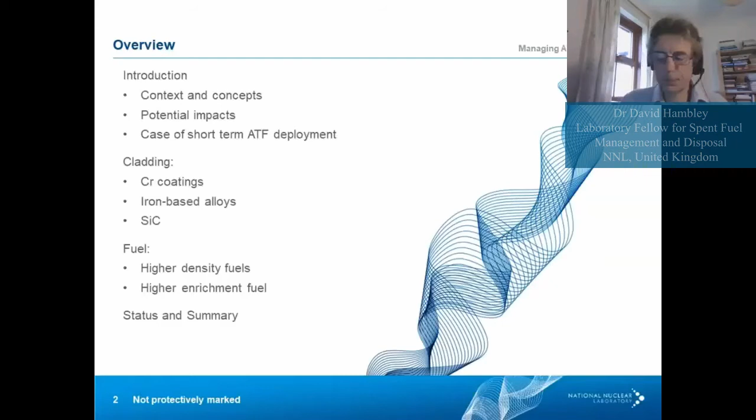Briefly, I'm going to introduce what accident-tolerant fuels are, where they came from, and what the potential impacts are. Then I'll give a summary of the main aspects associated with the most common types of cladding and fuel currently being considered, and a brief summary of where that leaves the position. Subsequent presentations will go into more detail on particular aspects of this.

Accident-tolerant fuels arose as a response to the Fukushima accident in 2011. In particular, the idea was to seek to improve the accident tolerance, the length of time fuel could survive under severe accident conditions, to allow improved capacity for management of severe accidents.

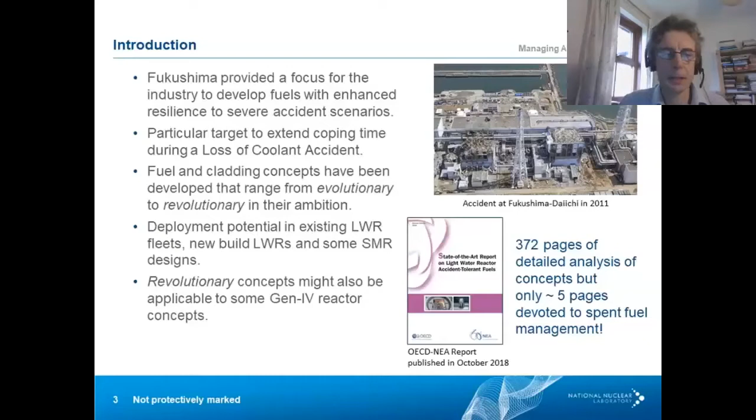It must be said that a lot of work has been done on analyzing the accident at Fukushima Daiichi, however very little has so far focused on the spent fuel management aspects, and it's now very timely that these are under consideration. In terms of the concepts of what an accident-tolerant fuel might look like, there are two strands.

One relates to cladding, and one relates to fuel. The cladding is primarily there to protect the fuel, and the improvements seek a cladding that will last longer in extreme conditions.

So we have coated zirconium alloys. People are also looking at iron alloys, and silicon carbide composites are the three main types of modifications being considered for the cladding. Of those, the chromium-coated zirconium alloys are closest to deployment or in the process of evaluation.

The fuel aspect really involves developments proposed to improve the economics and make accident-tolerant fuels more attractive for reactor operators.

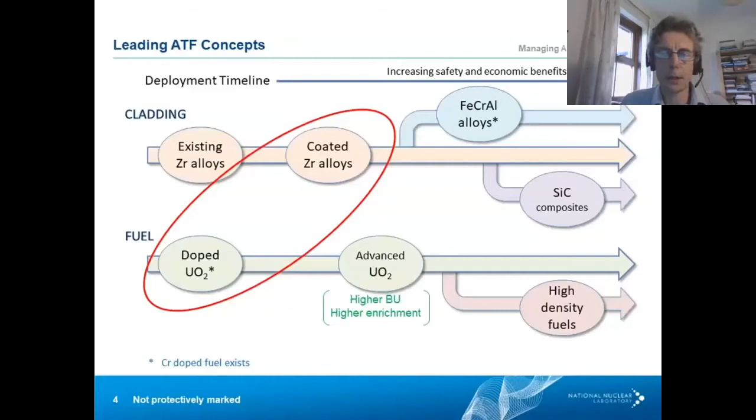There we're looking at doped UO2 and advanced UO2, which allows us to go to higher burnups and higher enrichments, thereby also reducing the amount of fuel we need. And finally, continued investigation into higher density fuels, which allows better irradiation performance.

Briefly, in terms of the impact of ATF, what do we mean? For us, spent fuel management means what happens to the fuel and how we manage it from its discharge from the reactor through storage, transport, and until it's disposed of in a repository. We also consider management of the fuel up to reprocessing, if that's a chosen route.

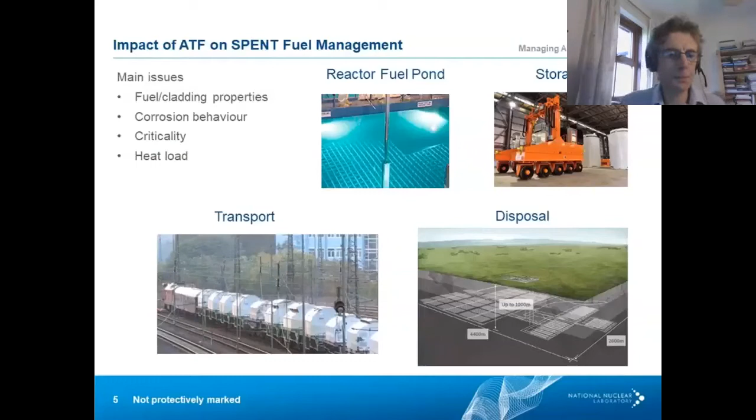This is just to highlight that it's not just about accident tolerance. We must have a product that is usable and deployable into nuclear reactors in a cost-effective way.

A lot of work has been done more recently looking at the economics of how we deploy the near-term options. I've put a brief slide here, and Al Santos will go into this in much more detail in his later presentation.

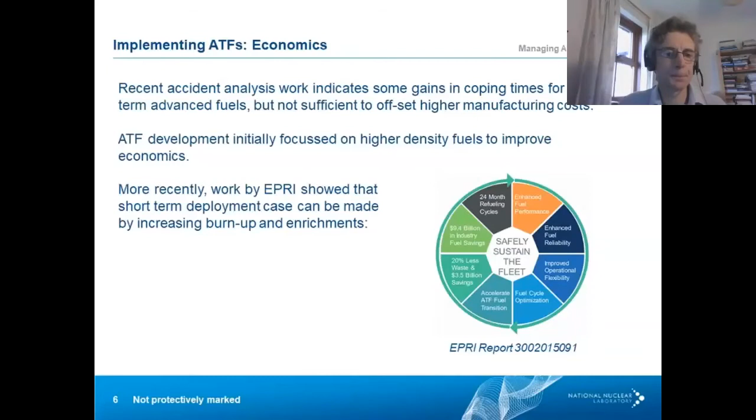Moving on to have a closer look at the claddings now. The first cladding, and the most advanced options, are associated with coating the zirconium alloy with a non-reactive coating, of which chromium has been the most attractive option and the one furthest towards deployment.

In these, chromium is deposited as a very thin layer on top of the zirconium cladding. It provides a non-reactive surface which produces a chromium oxide surface layer, which continues to protect the cladding up to much higher temperatures and delays the onset of any zirconium-steam reaction.

The pictures you see here are of the chromium-coated cladding in the bottom left-hand corner. In the top right-hand corner is a cross section, and the very bright layer at the top shows the thickness of the chromium coating, which is very thin but very well adhered. The bottom right shows a more detailed example of the coating.

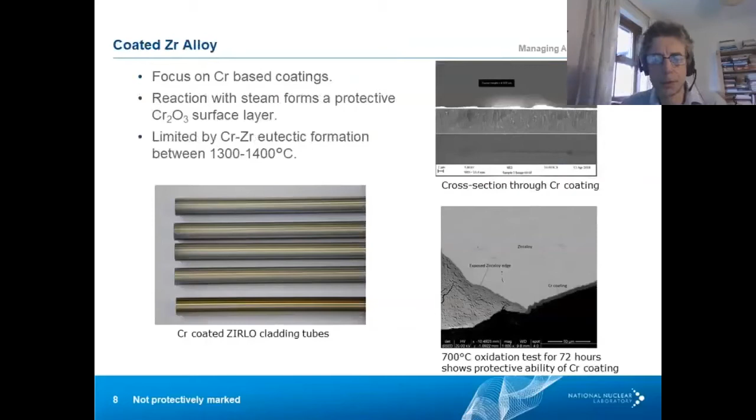You can see immediately the effectiveness of the coating through this defect in the cladding coating, which was deliberately left there to explore and demonstrate the effects of oxidation.

So in terms of thinking about their impact on the back end, chromium coating significantly reduces weight gain during steam testing. Hydrogen production is also reduced in normal operations, and therefore the risk of hydride formation or reorientation during subsequent storage is also much reduced.

In general, we expect that the performance will not be adversely affected, whether that's in storage, transport, reprocessing, or disposal. The failure site characteristics and matrix corrosion are not expected to be adversely affected.

There's a question about whether putting a large amount of chromium into a repository system might give rise to some chromate levels in the repository, which might alter water chemistry. That's something that would need to be looked at in the future. But overall, these are not expected to have a significant impact on the back end.

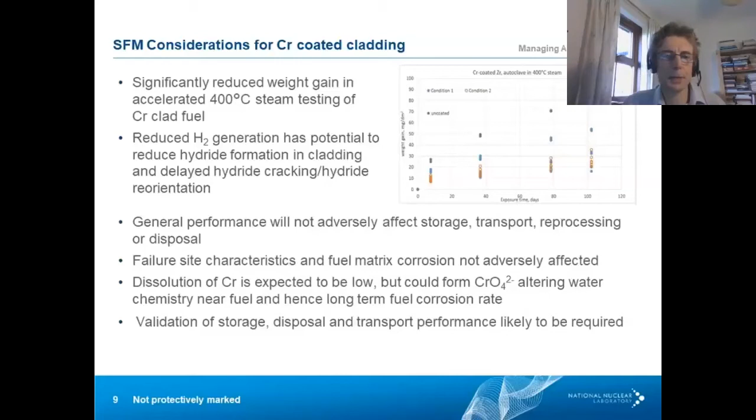Moving on to iron alloys. The iron alloys have been used in the past and are still used in some reactor systems. In general, they have a neutron penalty, and zirconium in water reactor systems offers better corrosion performance.

However, the alloys under consideration include aluminium for higher temperature oxidation and an iron-chrome mix that provides a protective layer under normal operating conditions.

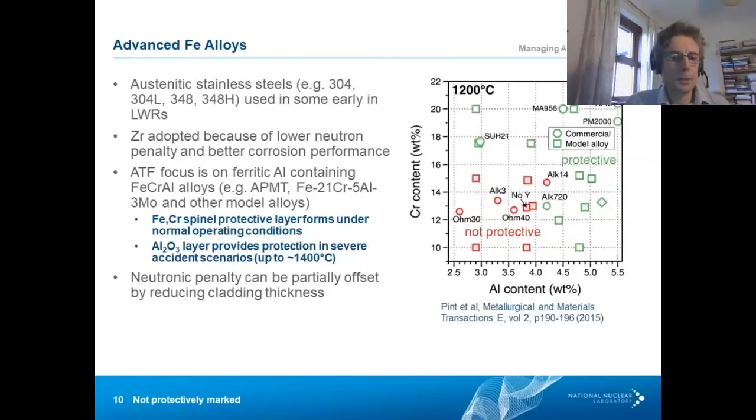In terms of the impact on the back end of this, we know from experience that stainless steels corrode very slowly over very long periods of time. In some cases, or some combinations of temperature and neutron irradiation, depletion of chromium at grain boundaries can occur, and that can lead to sensitization. Although the extent depends on exactly the grade of steel and the irradiation conditions, storage conditions that mitigate the risk associated with corrosion have been established around the world.

And therefore, so long as the sensitization of the stainless steel is compensated for, the presence of steel as a cladding is not expected to generate any significant issues during back-end management.

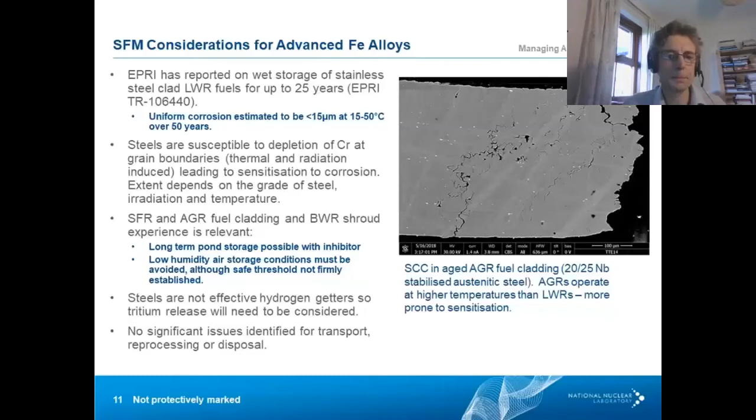Looking briefly now at silicon carbide composites, these are very different from current cladding materials, very attractive due to their high temperature oxidation resistance and low neutron absorption. However, they are novel. There are challenges around the cost of manufacturing, the ability to manufacture the fuels, and their long-term hydrothermal behavior. This is seen as a much longer-term development opportunity, and research is ongoing on that, and it's important that as that research progresses, consideration of the conditions in the back end of the fuel cycle are also taken on board, and that can be done effectively during the development programs.

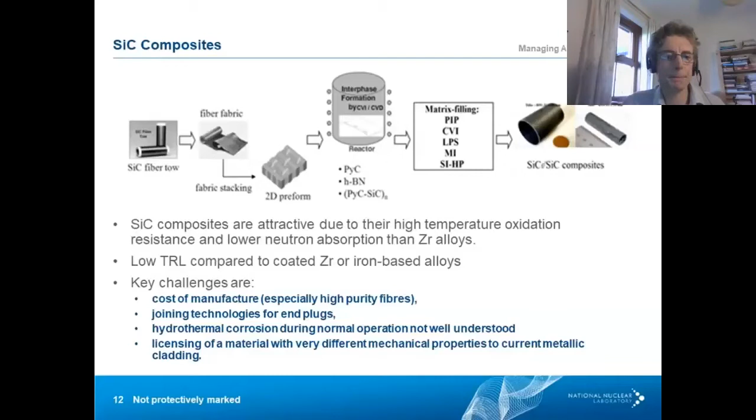There's very little data on the behavior of silicon carbide composites post-irradiation. There is only anecdotal evidence from the management of research and development fuels, but there is need for a systematic evaluation of their behavior after irradiation under relevant conditions.

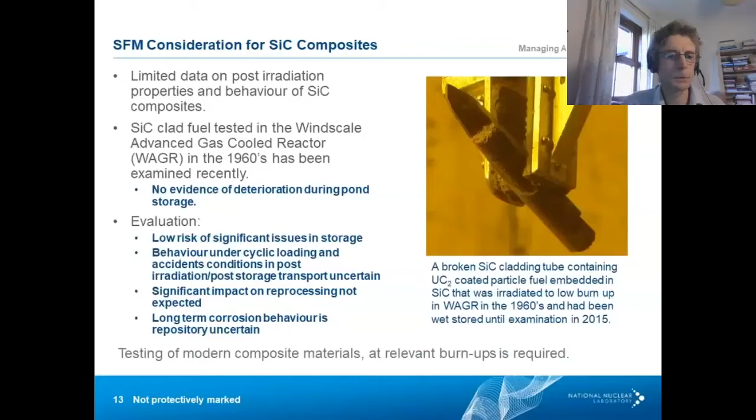Finally, I'm going to talk briefly about potential changes in the fuel itself. In terms of improving the fuel, to reduce the temperature inside the fuel during accident conditions, it's possible to dope the fuels to improve their thermal conductivity and or to change the grain size so that fission gas release is reduced.

Work was already well underway looking at chromium doping for larger grains to reduce fission gas release, and further work on that is expected to continue. I should just say that on the doped fuels, they're not expected to have a significant impact on the back end, although the effect of additives on oxidation behavior would need to be confirmed, but it's more expected to be a confirmation than a source of concern.

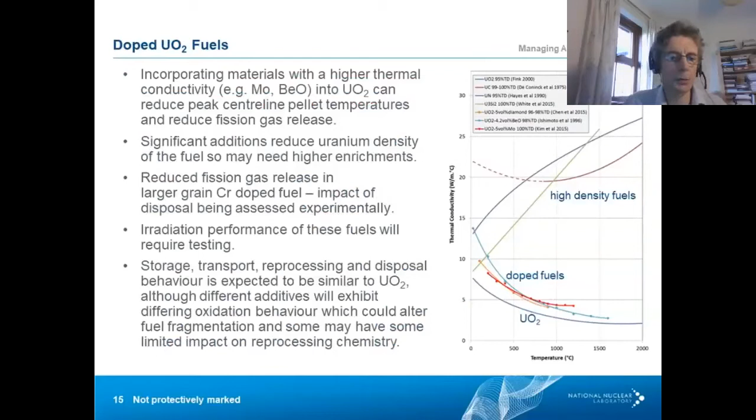Looking at the other higher density fuels, a large number have been examined over the years, and some are still under consideration for fast reactor applications. They are, however, in general, much more reactive than uranium dioxide. The four listed here have all been looked at to some extent during recent years, and both the carbides and the silicides have fallen by the wayside as a result of their poor reactivity with water.

The main contenders still under development at the moment are nitride fuels, where continued work on doping and modifying the fuel to enhance its resistivity to water exposure are still underway. These are much longer term prospects, as there are challenges both in the fuel development, manufacturing, and also in demonstrating compatibility with irradiation conditions.

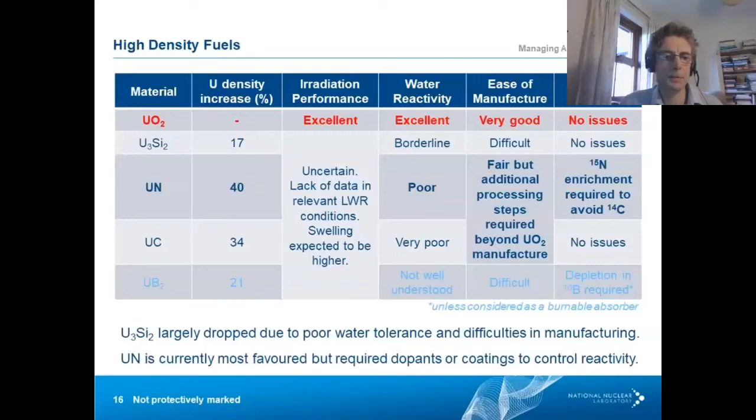If we think about the back end, reactivity with water and air remain issues for storage, transport, and disposal. Although the temperatures are much lower under these conditions, the duration of exposure is also potentially much longer, and therefore behavior of irradiated materials under less extreme conditions needs to be understood. The mechanisms may also be slightly different, although that mainly relates to silicides rather than oxide and nitride forms.

In reactor performance, improvements in terms of stability of exposure to water will automatically help the management of these materials in the back end. Reprocessing of the higher density fuels should be feasible, and likewise recycling, but they are more challenging than current standard oxide fuel reprocessing.

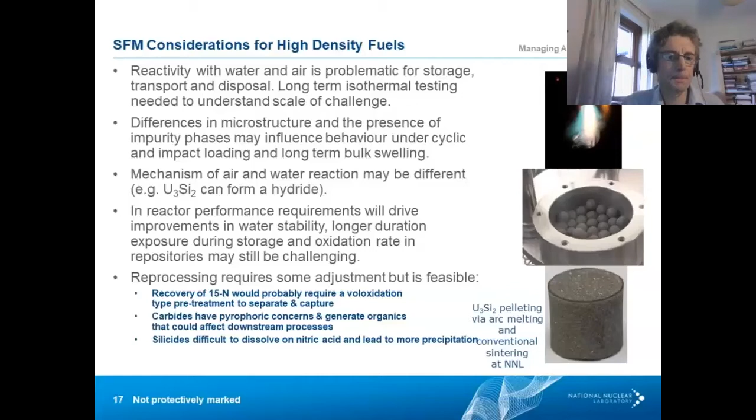The near-term deployment option would be to increase the enrichment of existing UO2 fuels. And there, the challenges are less, but there are still some challenges, particularly around criticality, having sufficient data to back up the validation of safety and inventory codes.

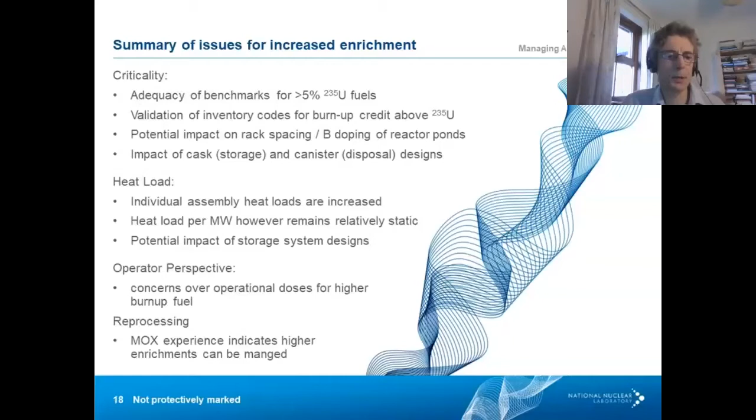The potential higher individual assembly heat loads would need consideration and might result in changes to the design of storage systems, although it's not expected to affect the fundamental basis of storage systems that we currently have. And there's a potential for higher operational doses from higher burn-up fuels. Again, these can be managed by design adaptations to existing systems. And the MOX experience indicates that higher enrichments and their effects can be adequately managed if you're looking at reprocessing.

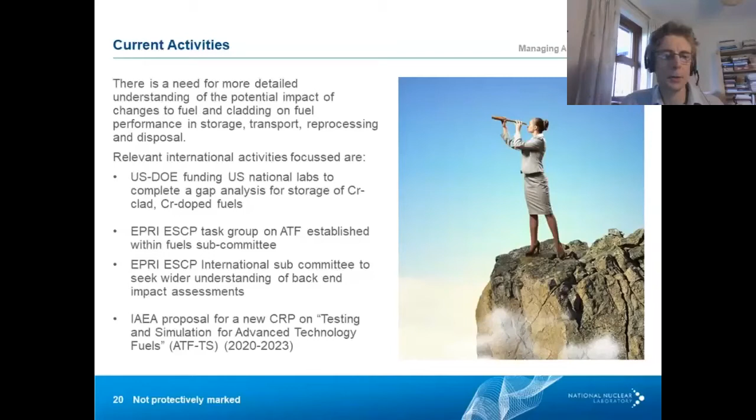There are lots of activities underway looking at the behavior of fuel and cladding in storage, transport, and disposal. Some of them are listed here, and these are valuable contributions to making sure that we can manage the back end, and that the new fuels do not present unexpected problems for their future management.

For higher density fuels, there remain challenges before they're shown to be acceptable. Both them and silicon carbide claddings would require substantial further work before we could be sure that they're manageable in the back end.

But such testing and validation could effectively be incorporated into the development programs in a cost-effective way. Thank you. That concludes my presentation.

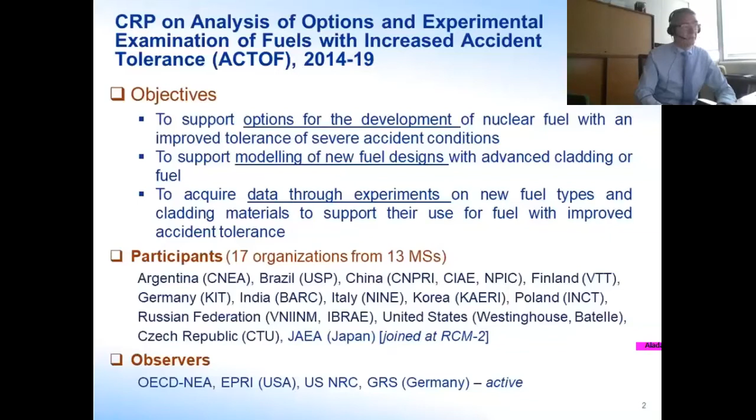And traditionally we have observers, and in this CRP we had our constant, permanent observers from OECD NEA, EPRI, US NRC, and GRS from Germany, who were active participants and participated in our benchmarks.

As I explained, the project was recently finished, and we have already published the tech doc with the main results, which you can find on the IAEA site, open access.

Normally a CRP includes individual tasks, but the most important part of the project is joint actions, where several collaborative activities are carried out. In this case, we had round-robin tests, a benchmark exercise, and a joint exercise of experimental modeling for severe accident conditions.

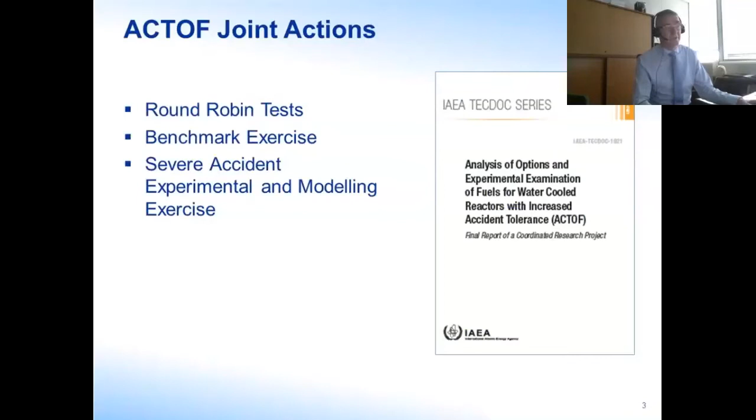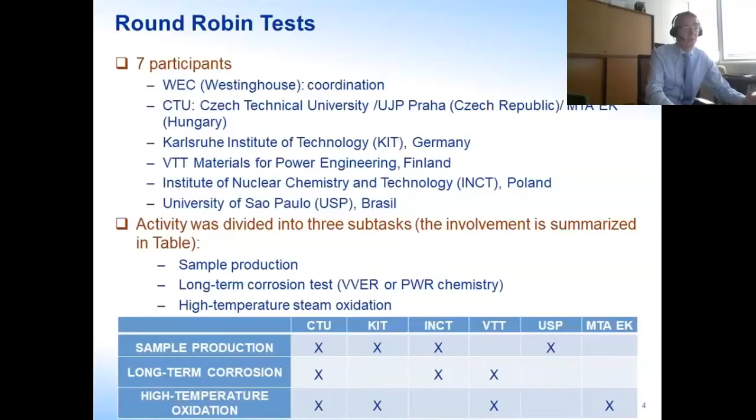There were 3 tasks: sample production, long-term corrosion test, and high-temperature oxidation tests. Each participant took part in one or several of these tasks. For instance, University of São Paulo provided their samples but did not participate in experiments, while Hungarians only ran experiments, but several participants participated in all 3 exercise stages.

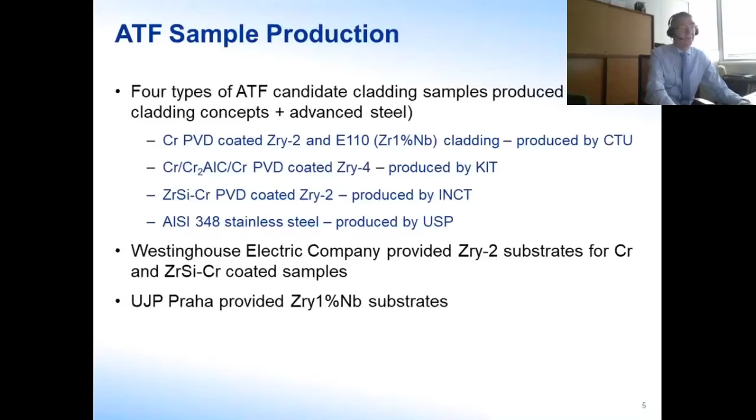Yeah, and a few slides about the main results, more interesting.

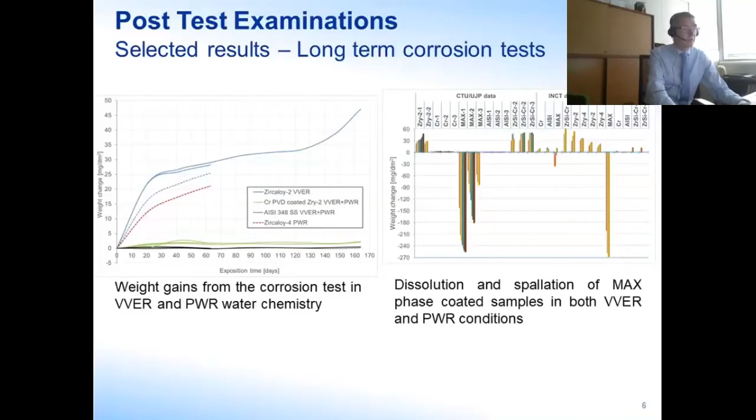Sometimes, as with max phase coatings, a very strong spallation effect was observed, so eventually there was no gain but loss of material. For this reason you cannot see it in the left graph. There was relatively good behavior for the steel samples, but the best, of course, was the chromium coated samples.

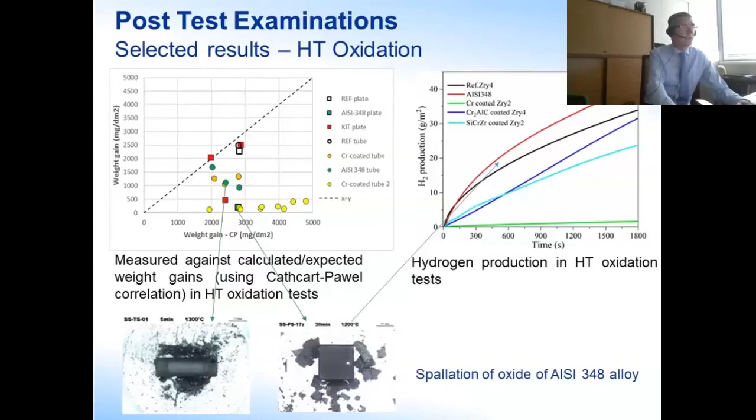For this reason, the main criterion eventually chosen was hydrogen produced. The black line is the reference zirconium alloy cladding, and due to this spallation effect, oxidation of steel was very high, while others performed better than standard Zircaloy. Again, the best behavior is shown by the chromium coated samples, also shown in this picture: two samples, one without coating and one with chromium coating, both at 1200 centigrade for 30 minutes. Here you can see the oxide layer thickness, with chromium much lower.

Special attention was paid to testing residual ductility. We only started this exercise, but it will certainly continue in the next CRP, because due to this effect of very small oxide layers, the traditional ECR criterion of 17% cannot be used, since oxides are very small and this is the main contribution to oxidation for ECR. On the other hand, ductility of these samples also increases, sometimes significantly. Many countries are now working on new criteria, and some preliminary results are shown in this picture, but I will not go into details.

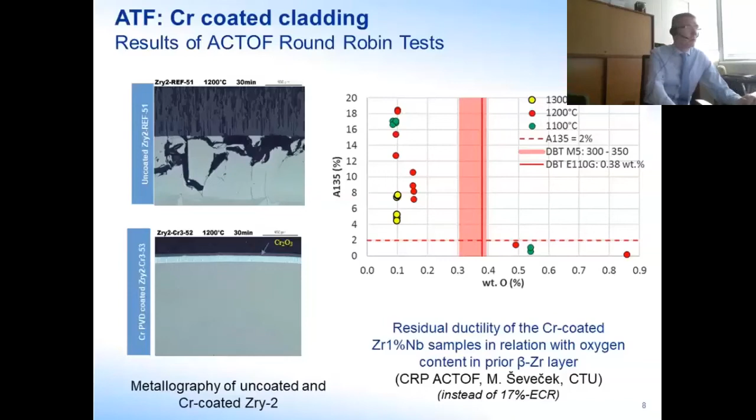Now talking about another exercise, as you remember we organized a benchmark. In this case it was a comparison of the behavior of FeCrAl against standard Zircaloy 4. This exercise was organized by INL, Idaho National Laboratory, who provided the modeling input, normal operation case specification for two cases, UO2 with FeCrAl and with Zircaloy 4, and LOCA case specification. It was two different exercises, including output format, in order to analyze, compare and review all the results.

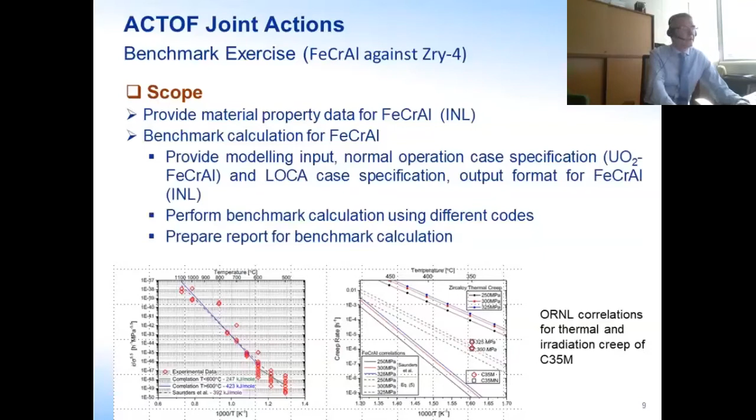Very briefly, we had six participants in this exercise: INL with Bison code, ENEA from Italy with Transuranus code, University of Sao Paulo with modified FRAPCON code, Argentina with their national BACO code, and Japan with JAEA using FEMAXI.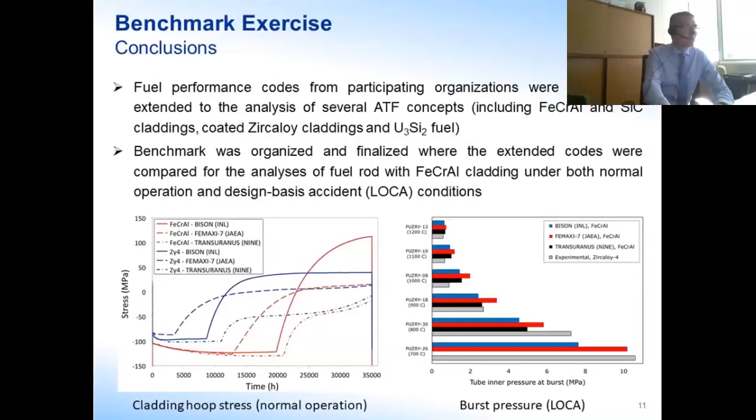The third work package, as I mentioned before, was the severe accident experimental modeling exercise, prepared by KIT, who shortly before our CRP carried out a new test, Quench 19, with FeCrAl cladding. It was an international test; materials were provided by the United States, Argonne Laboratory, and used in the bundle facility of KIT for Quench 19 with FeCrAl claddings. This data was analyzed using two severe accident codes, with two participants at that time: GRS from Germany with ATHLET-CD, and IBRAE from Russia participated with the Russian code SOCRAT.

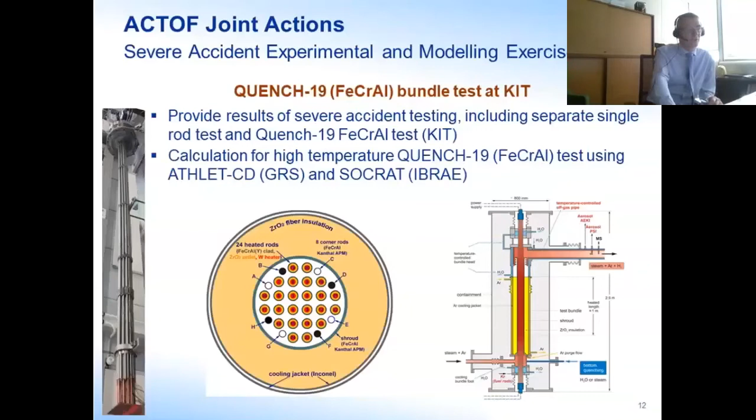Just a couple of examples. For instance, the left picture shows relatively good representation of measured temperatures in calculations. However, the most important result, hydrogen production, was strongly underestimated.

This was the reason why we took the decision to continue this exercise in the new CRP. But in this case, we'll have more codes, not only these two, but also such codes as MELCOR, ASTEC, and so on.

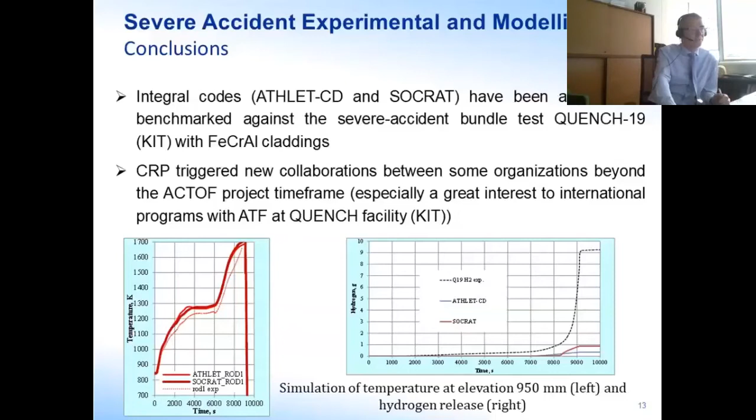Now I have several minutes to talk about the new project, new CRP, Testing and Simulation of Advanced Technology Fuels, ATFTS, which was launched recently, also foreseen for 4 years.

As usual, it was advised we have a technical working group on fuel performance and technology, which normally makes recommendations to our section on what type of activities to plan in our programmatic plans. Before starting this CRP, we organized a technical meeting on fuel behavior in accident conditions, where we had a special technical session on this topic, and the proposals were collected.

The next preliminary step was a consultancy meeting on preparation of the new CRP proposal. Then it was submitted to the IAEA committee, which approved it. Currently we are waiting - we wanted to organize the first RCM this summer, but due to COVID, we decided to shift it to March and hope we will be able to organize it face-to-face. So currently we have 18 participants, agreements and contracts, but the project is still open for new participants.

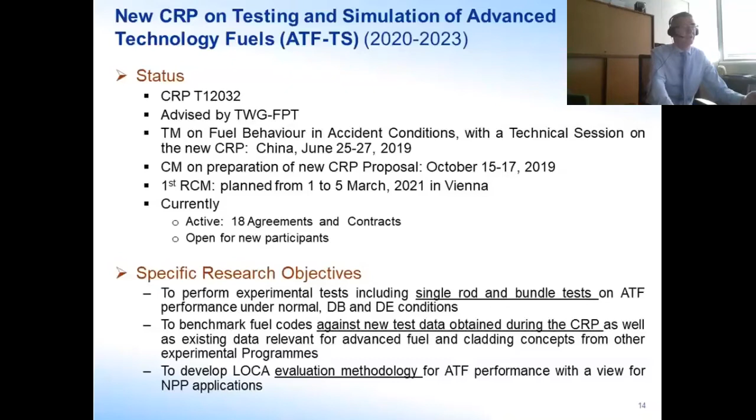Research objectives are similar to the previous one, but in more detail, since the first CRP can be considered preparatory for the second one. Here we have also an experimental program, I mean joint activities, separate from individual efforts. So here we are planning to have round-robin tests on coated cladding.

You remember that in the first CRP it was mainly oxidation, high temperature, and autoclave corrosion tests. For this reason, here we'll focus more on thermomechanical behavior. For instance, ballooning, burst isothermal test, ballooning and burst transient, LOCA test, using different - this is preliminary facilities, because finally all activities will be coordinated and approved at the first RCM.

Also, we are going to perform joint tests with FeCrAl, starting with high temperature oxidation tests, autoclave oxidation tests, and probably thermomechanical behavior as well. Silicon carbide, we are not sure, but still planning.

Then, very interesting, we have an interesting proposal from CRIEPI Japan. They have a new test facility for severe accident testing, and they propose to perform tests with coated Zircaloy-4 under severe accident conditions or LOCA. It will be also decided at the first RCM.

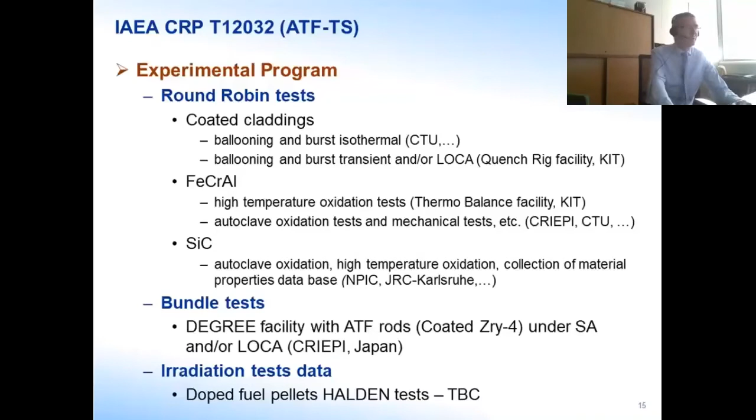Then we have severe accident modeling benchmarks. As I already mentioned, we hope to have the CRIEPI facility test data, but while waiting for new experimental data, we shall start with the Quench 19 test, continuing as I mentioned before. In this exercise we'll have more codes - ASTEC, ATHLET-CD, MELCOR, maybe Socrat as well are expected to participate.

Also, the third work package will be organized by TRACTEBEL: LOCA evaluation methodology development for nuclear power plant applications - a more practical approach on how to use fuel performance codes for licensing, because TRACTEBEL is involved in licensing, and so they prepare such an exercise, including uncertainty analysis in application for new materials, in this case ATF materials.

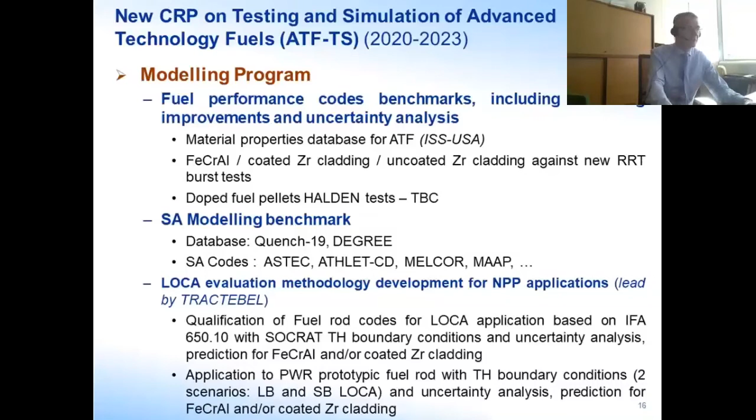So I think that's all. Thank you very much for your attention, and welcome to the new CRP, where you still have an opportunity to join us, if not yet. Thank you very much.

Thank you very much, Mikhail, for this very interesting overview of the international R&D efforts on the design of ATFs and the associated post-irradiation examination tests coordinated by the IAEA.

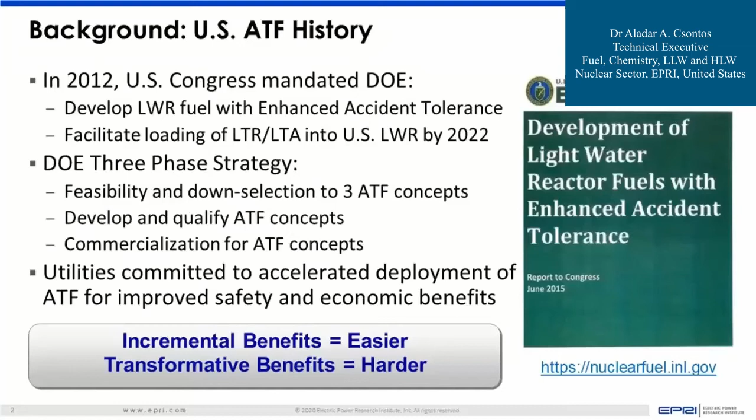Traditionally in the U.S. there's a long time frame from design to deployment of new fuel concepts. We don't have the time to spend on another 15 to 20 year project to develop new fuels to then implement. The reason is that we're losing more and more facilities like Halden, so we need to do this testing and get the data to support the licensing now while there are facilities.

We have an abundant supply of R&D programs. You can see the activities that are going on here at IAEA, at OECD NEA, and also with ourselves at EPRI and the Department of Energy, et cetera.

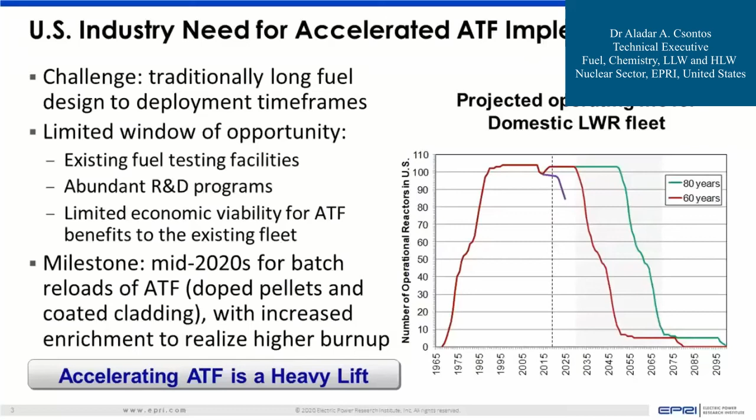So I'll talk now about some of the activities we're looking at here at EPRI. What we did back in 2016 to 2019 was develop scoping studies looking at the safety benefits associated with the different ATF concepts, both near-term and longer-term, and converted them into economic benefits. You can see that this was to develop the industry ATF business case.

I'll show you some of the reports that we have, but there are some that are proprietary and some that are available to the public. You can get a glean on the business case. We have developed the business case report and such, but that's proprietary to our members, utility members.

But you can get a glean of what those cost benefits are from our public report, and you'll see them in my summary slide. Basically, what we have here is the cost of the R&D, cost of the licensing, and also the cost for utility implementation. Those are all significant costs.

And then on this side, with fuel utilization, these are in order of the benefits in terms of impact in terms of savings: fuel utilization for higher burnup, fuel efficiency with higher enrichment, operational flexibility, meaning that if you have improved safety, you can then have more operational flexibility because you now have more margins, and then, of course, increased fuel reliability.

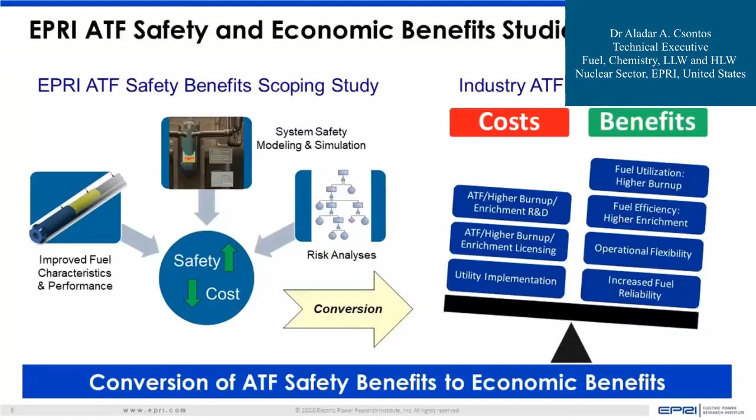So in summary, as a high-level summary, and of course you can go to the reports to download and get much more details, we looked into severe accident analysis, design basis accidents, anticipated operational occurrences, as well as normal conditions.

What you have here is that the safety benefits vary among the ATF cladding fuel concepts. We looked at a variety of different ones, probably hundreds of different cases. The safety benefits really depend on your cladding types, fuel concepts, design accident scenarios, beyond design-basis accident scenarios, your AOOs, and then your reactor types. PWR and BWR act differently, and also different types of PWRs act differently.

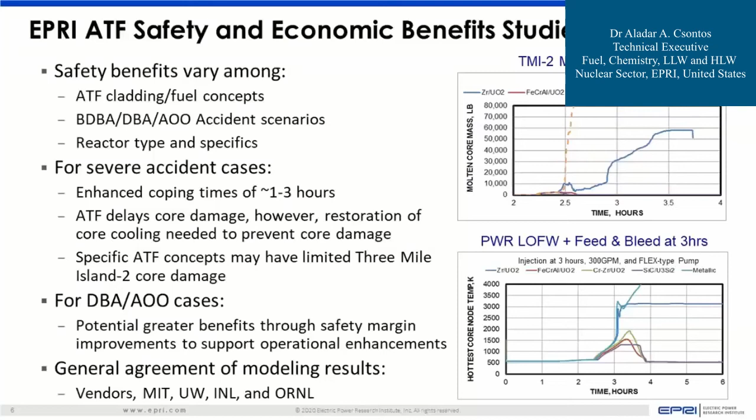So you can see that these concepts do have an accident tolerance feature that can provide increased margins, and that's a big part of how we can then look into the operational enhancements that come about from those safety margin improvements. Lastly, I just want to say that we got general agreement and consensus from most of the participants involved in this.

This is a graphic—David showed the different concepts. I wanted to show some of the potential benefits of the coated claddings, because this is where the U.S. utilities are going today. In this case, this is a key aspect here.

NRC has done a really good job—our regulator in the United States—looking into the regulatory requirements or the regulatory framework. This doesn't mean there aren't data needs; there are substantial data needs associated with this. But there's a document out there, NRC ISG-01, drafted back in January of 2020. You can download it from NRC's website, and it goes into a lot of detail on the framework for the whole fuel cycle, from the front end all the way to the back end.

There's also a presentation that just came out two weeks ago from the EPRI Extended Storage and Collaboration Program meeting, the virtual meeting we held, where NRC presented a very good summary of the issues for the front end and also for the back end. That was very informative and very useful for us.

The enhanced coping times I talked about earlier, reduced potential for fuel relocation—here are LOCA accident experiments provided by Westinghouse Corporation, looking into the chromium coated versus the Zirlo. You can see here that the opening size of these events, the burst opening sizes, are much smaller than the Zirlo, which then reduces the amount of fuel relocation during LOCA.

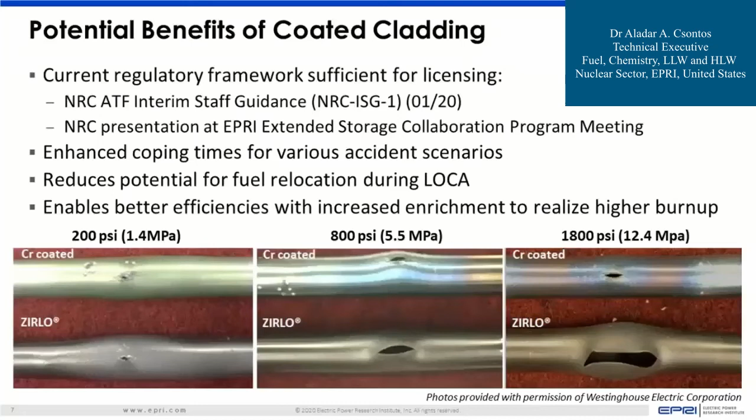So all that is being done, and I guess David was talking about this earlier, I want to go into a little bit more detail about this graphic, which is showing why in the U.S. utilities are moving for coated claddings with higher enrichment and higher burnup.

So you have these enhanced safety pieces: enhanced fuel performance, enhanced fuel reliability, improved operational flexibility from the increased safety margins, and then fuel cycle optimization. We have several reports looking into optimizing the fuel cycle with higher enrichments and higher burnups. That provides the economic benefits that enable ATF and its enhanced safety to be adopted more rapidly in the United States, with the market driving the improved safety in this case.

And what is the market? The market is 20% less waste, so more efficient use of the fuel. That reduces the cost burdens for waste disposal and waste storage, which is a savings of about $3.5 billion for our U.S. fleet. On top of that, with the increase in enrichment and higher burnups, there's almost $9.4 billion in savings for fuel.

That enables a 24-month cycle, which is the driver that then implements the enhanced safety with the adoption of ATF.

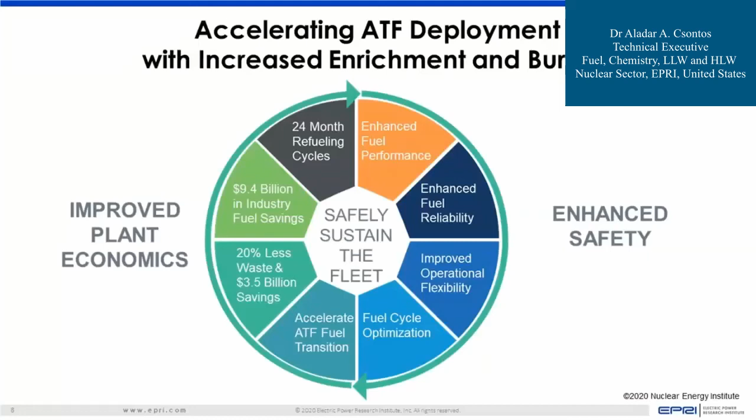So to show that it's real, these are the utilities and sites that are emplacing different types of these ATF concepts, fuel and cladding types, into their reactors as LTA programs, lead test assembly programs. This is in addition to the substantial research going on at national labs and other facilities looking into post-irradiation examination of these LTAs and non-destructive evaluation post-irradiation in these facilities.

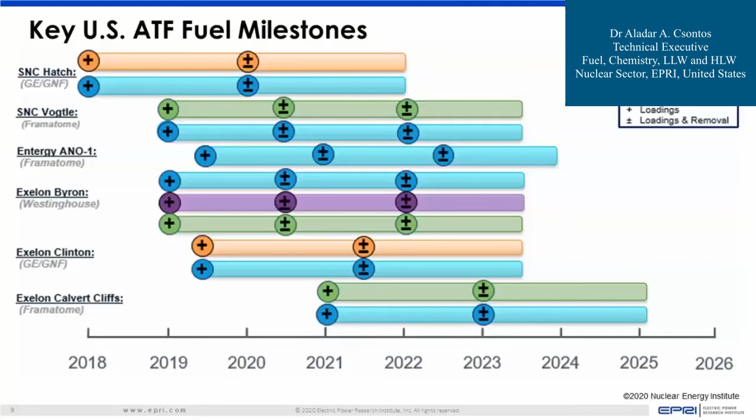Now I'm going to talk about the back end briefly, specifically our ESCP collaboration meeting, where we had a workshop on the impact of advanced fuels for the back end.

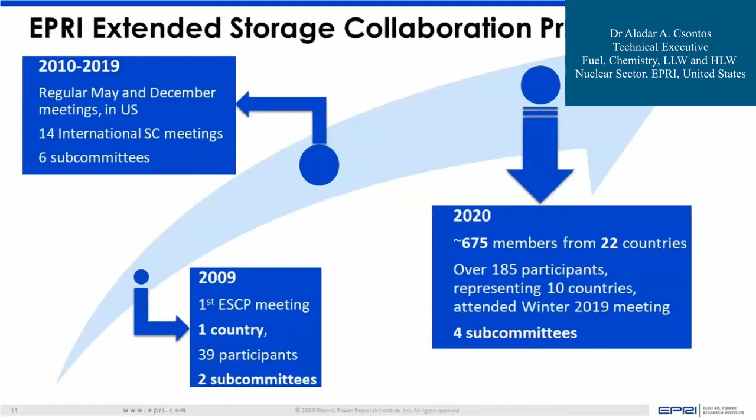This is a high-level summary of the ESCP program, Extended Storage Collaboration Program. It's about 11 years old now, and we have 675 members from 22 countries. In the meeting we had over 185 participants representing 10 countries, and we have 4 subcommittees. I'm the lead for the thermal subcommittee for the ESCP program.

What we did there is we wanted to have this workshop on advanced fuels' impacts on the back end, last year - so it's about a year old. It was broken down into 4 sections: the description of the ATF concepts, kind of like what David was presenting today.

The used fuel program updates, so the fuel vendors could understand what the used fuel perspectives are, because as David was showing, in the United States we've been focusing not just on operations but on both the front end and the back end. So we were presenting the fuel vendors a perspective of the used fuel programs in the United States. Then we had the fuel vendors present their advanced fuel development programs.

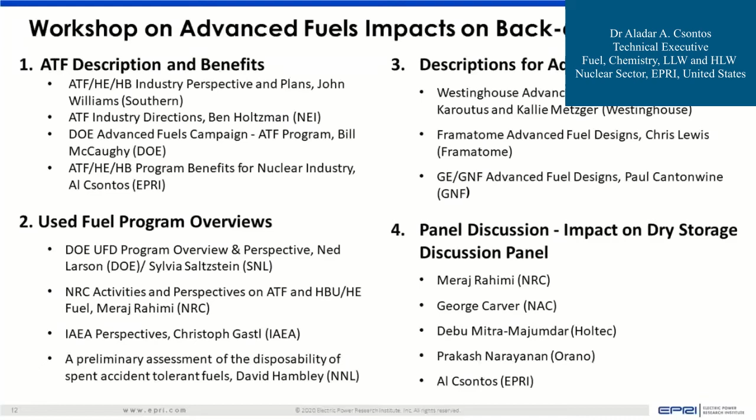And then we had a panel discussion on the impact for dry storage that included NRC, and the 3 dry storage vendors, and myself.

So when we looked into the potential impact for the back end, we looked into the spent fuel pool, dry storage, centralized storage, transportation, and disposal. The consensus was that coated claddings by themselves have very limited impact on the back end operations. There may be some small changes here or there, but for the most part it's not a very big impact.

Higher burnup and enrichment have a potentially greater impact depending on the level of enrichment and the level of burnup extensions. So that's a dependency clause, if we want to call it that, for this particular impact for higher burnup and enrichment.

Primarily for these concepts - coated claddings with higher enrichment and higher burnups - the issues are, across the board, criticality. Getting more benchmarking and more data to support the criticality analysis is going to be important.

Thermal management is a secondary issue as well, meaning that if you have higher burnup you may be having higher temperatures. So getting more understanding of the thermal impacts and then also the accident analysis thereof.

Another area that NRC has identified for dry storage is the need for cladding properties, the mechanical properties, so that they can do an analysis to show during accidents and transportation that a safety finding can be made.

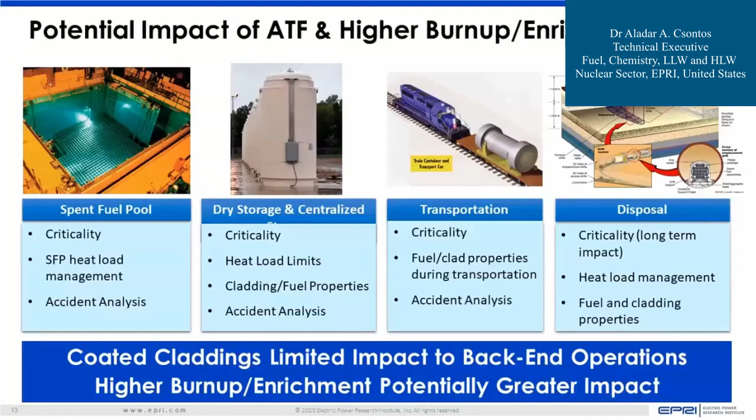So a high-level summary of the research that's underway now. We're working with OECD NEA on the KIT quench testing program for high temperature oxidation and coating stability.

Also, as Mikhail mentioned, the IAEA coordinated research projects that he identified earlier. We're doing some work on hydrogen pickup and permeability modeling, as well as coated cladding performance, balloon and burst, and fuel relocation.

This is an area where DOE, as part of the workshop from last year, the Department of Energy in the United States is looking into developing a report that's expected in 2021, looking at the data needs for ATF and higher enrichment, higher burnups for the back end. So what are the data needs and how are we going to get them? That's going to be a report expected next year.

We are just underway starting these two efforts, looking into decay heat testing and modeling, and then spent fuel criticality modeling as a result of these new ATF concepts with higher enrichment.

This workshop I've highlighted here is in two weeks, and it's on sensors, and that goes to addressing one of the thermal areas and other areas we're looking into.

One of the areas that we're thinking about is, when you have new fuel concepts, how are we going to be able to maybe change the approaches by collecting data, as opposed to having to spend a lot of money in the United States looking at high burnup fuel in a cask and having it stored for many years, which was very expensive.

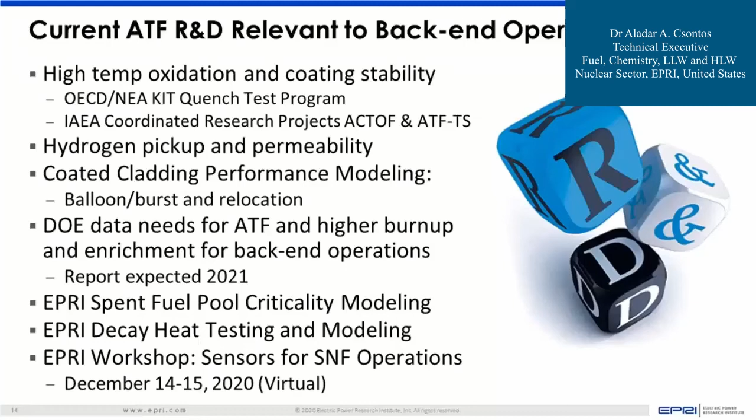So in summary, EPRI is providing independent assessments, and you can download these three documents. You can go to EPRI.com, go into the search feature up on top of the page, put in these report numbers, and you'll be able to download these three reports.

We have a proprietary report looking at coated claddings with doped pellets. We also have a second update on this document here as well, and that's also proprietary. And there are several other fuel optimization or fuel utilization reports that are also proprietary.

These are the three areas that we looked at, looking into the impacts of ATF and higher enrichment, higher burnup. We had last year's workshop, this year's ESCP program, and then the sensor workshop coming up in two weeks. And with that, I will end and take questions.

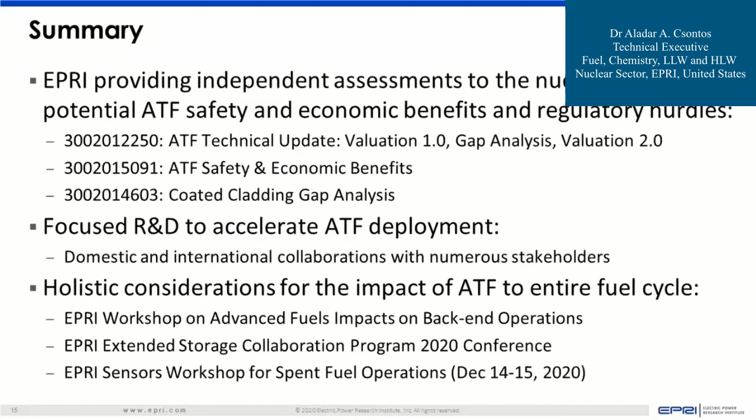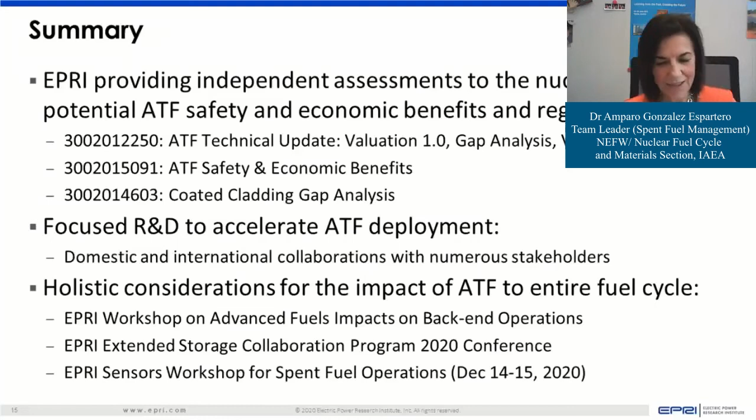Thank you very much, Al, for providing this very comprehensive overview, an excellent example of the American nuclear industry anticipating the challenges of the deployment of accident-tolerant fuel in this integrated manner, gathering all potential actors in the work.